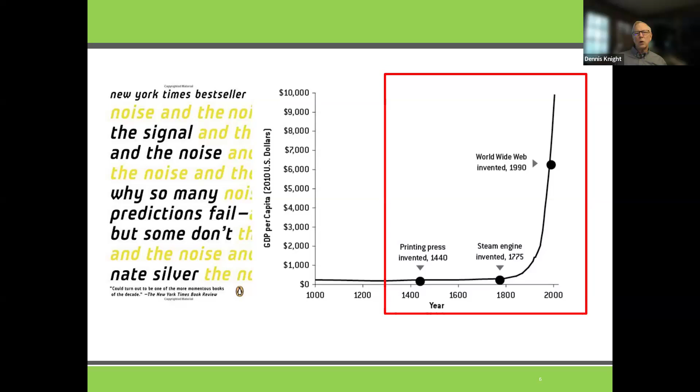So one thing, the improvements in technology since the dawn of the industrial age, and really since the printing press, have allowed mankind to continually improve their standard of living. I've got the gross domestic product in US dollars per capita over on the left here. And you can see that since we developed the steam engine, then the World Wide Web, and now AI, the opportunities to improve the human condition, raise all boats, and help us all live better, healthier, and safer lives just get greater and greater by applying technology to help us do our work, be more productive, do better jobs, and build better buildings.

So we're going to talk about BIM. We're going to talk about integrated analytics. And this is what I want you to take away from this presentation: let's not think about this as a drafting tool, a three-dimensional drafting tool. You'll see what I mean as I get further into it. But how we can automate some of our design, what some of our future trends are, and where these technologies fit into our codes and standards, especially some of the ASHRAE standards that are coming out.

So what is integrated design? Way back in 2007, I was chair of TC 7.01, which is integrated building design. And we wrote the first chapter in the ASHRAE Applications Handbook on integrated design. It's chapter 57 in the Applications Handbook. And we defined it as the interaction among all building disciplines from earliest concept development all the way through the whole building life cycle, in order to achieve an integration of design efforts and the operation of the total building. And that's key.

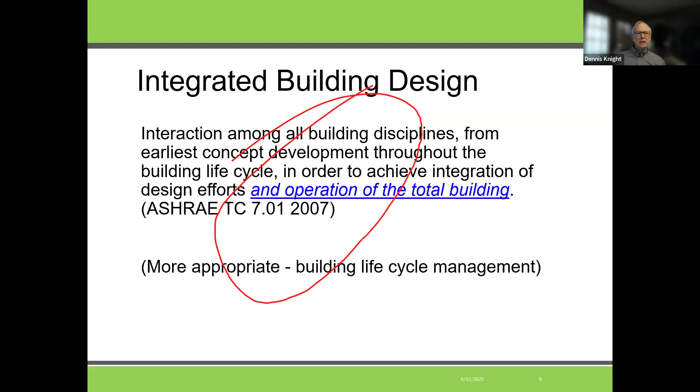Normally our contracts stop at the end of design or at least construction when the owner takes occupancy, but these tools and integrated design processes are thought of as a way to stay with the building throughout its life cycle and keep it working as it's always been intended from day one, and keeping us involved for longer periods of time.

So what is BIM? I don't know if you use US standards or ISO standards or CEN standards, but the definition's about the same in all of them. A BIM model is a digital representation of both the physical, so that's the three-dimensional drafting part I talked about, and the functional characteristics of a facility.

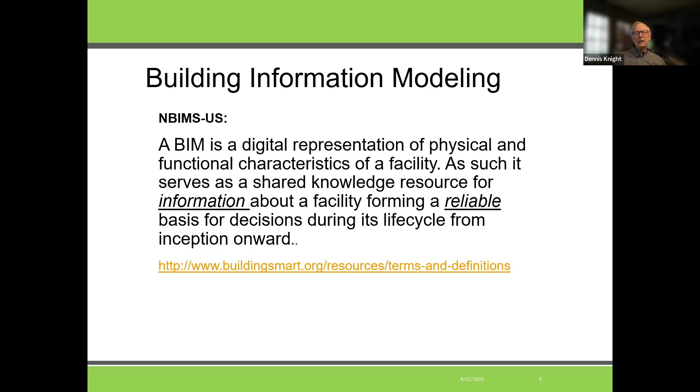And the functional characteristics are what each object or entity within the building does, what it's made of, what its emissions are nowadays, what embodied carbon, what is its operational carbon. Functional characteristics are data that can be built into the objects within your model so that we can do analysis. So it's a shared knowledge resource that follows the building and helps you make better decisions throughout the life cycle of the building.

There are lots of tools. These are just a few. This isn't meant to be proprietary. There are literally hundreds of tools out there that either are a BIM tool or now are interoperable with your BIM tools to help you do your analysis. And so I won't dwell on this long. I just wanted you to know that the word BIM is an umbrella that covers all of these tools that are working in this multi-dimensional environment.

And then integrated building design is a process. That's the end game. We use these tools so that every component is modeled and drawn using these tools. Data is added to it, and the output is a holistic product that can solve many chronic problems within the building industry, whether it's with design, whether it's with construction or constructability, or operability of a building.

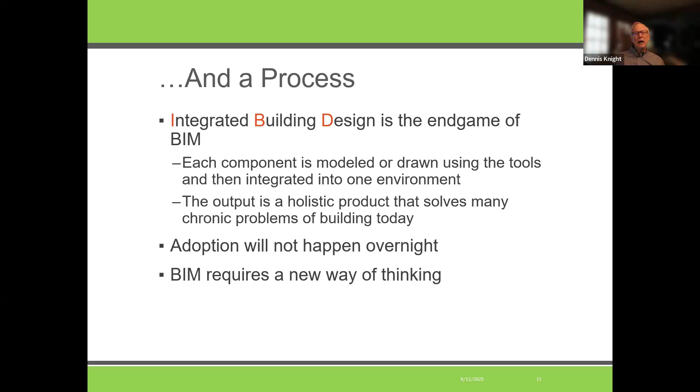Now, I've been talking about this since 2000, for 25 years. I said adoption will not happen overnight, and it hasn't. And we still have a long way to go throughout the world and even here in the US with everybody adopting these technologies. But it requires us to think about a building like we would build a building from the ground up and really think through, if we're going to leverage the power of the technology, every decision we make, every piece of equipment, every material we put into a building.

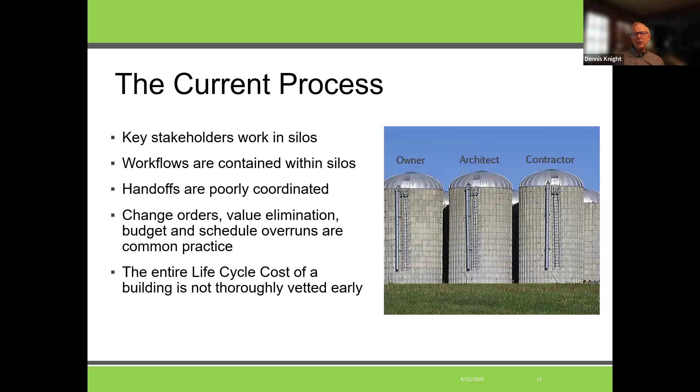What is our current process? Even now, our stakeholders kind of stay in their silos, and our workflows are contained in those silos, and rightly they should be. We should work within our area of expertise, but our handoffs are poorly coordinated between each other, and that causes things like change orders, value engineering, or you'll see I call it value elimination here in a few minutes, budget overruns, schedule overruns. And when we make changes, we often don't think about the life cycle cost of a building and don't thoroughly vet those things early enough.

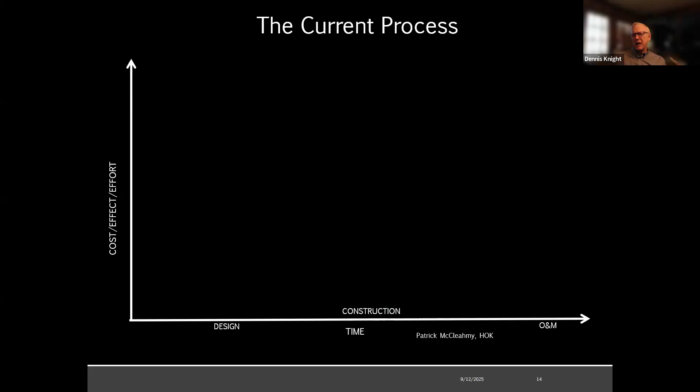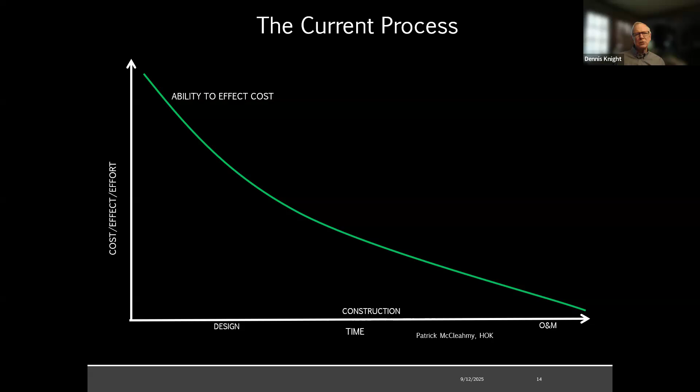So I'd like to go through a little graph that describes this process fairly clearly. So on the left, you have cost, effect, and effort. On the bottom is time, design, construction, and operations and maintenance. So if you were to look at this, our ability to affect the cost of a building diminishes the further down that timeline we go. The more decisions that get made, the less ability we have to change the outcome of that building, what it will cost initially, and how much it will cost that owner throughout its lifetime.

And conversely, as we go down time, the more decisions we've made and set in concrete, the cost of making changes goes up exponentially. So we don't get into construction and decide, we've got half our HVAC systems handled and they're chilled water, hot water, air handlers and VAV units, and then say all of a sudden we're going to go to packaged rooftop air handlers. The cost of that change would be astronomical. So making big changes down the road costs us a lot of money.

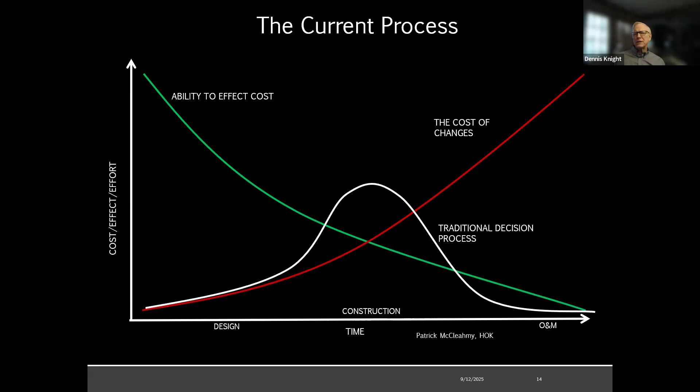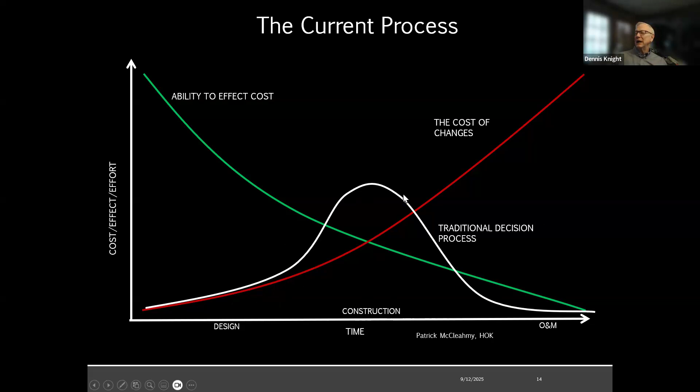Our typical design process is we're all waiting for our other friends in those other silos to get done with their work. We want to let them get done. We only want to do our work once. So we wait. Then we finish up our work. The work comes in over budget, and then we have to work to get it under budget and get it back on track.

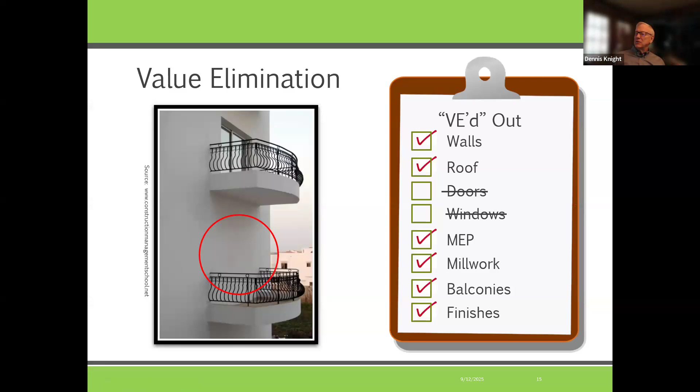And what happens is we go through that ugly value elimination. It's called value engineering, but someone proposes a list of things to cut cost. An owner accepts those things without thinking, maybe without running things by other people. And then we end up with things like this, where something got eliminated that was of value that should not have gotten eliminated. And those things actually happen in real day-to-day construction.

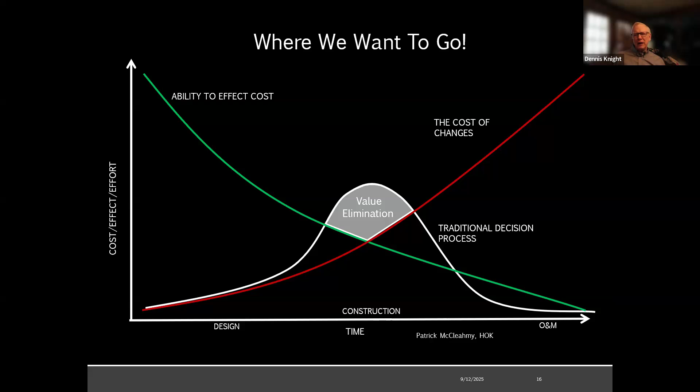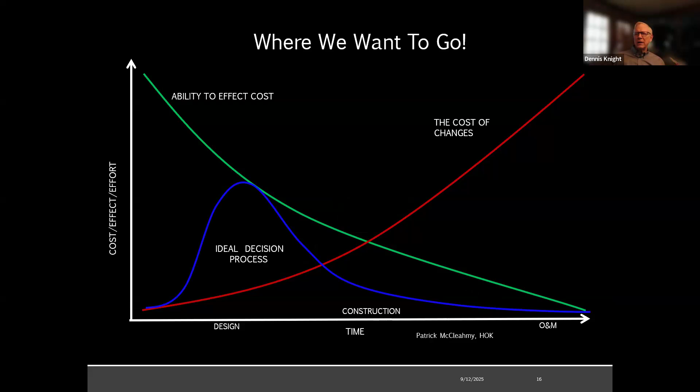So we want to eliminate this value elimination phase or value engineering phase by thinking about things early and create what I call the ideal decision-making process. And BIM allows us to do that because we can build that building virtually in our minds and our computers and do anything we want to it and simulate it before we ever put the first shovel in the ground. And that creates this ideal decision-making process. And that's the real definition of value engineering in my perspective.

So let's look at where we're at. We are at this crossroads. There's still a lot of firms using two-dimensional drafting processes, and a lot of our building code officials still have to use two-dimensional drawings and plans and spec books to evaluate a process. And those are static. Other than the data that you can read in them, that data is not very interactive with anything. So we're in the process of transitioning to what I call a multi-dimensional virtual work environment. Notice I didn't say three-dimensional because I want you to think beyond drafting.

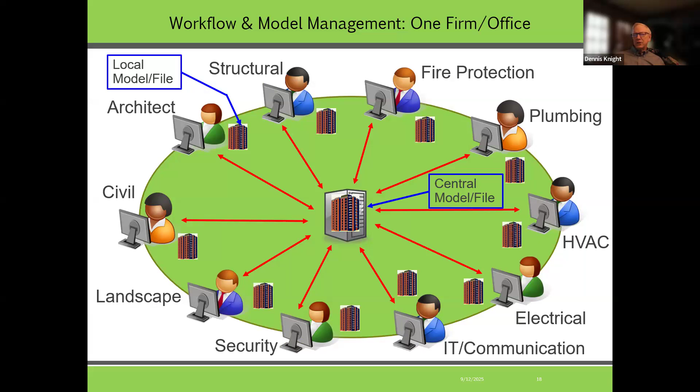Now, some of us are beginning to work, if we're a big firm, with these BIM models. There's a central server somewhere in our office, and all our disciplines are together. Each discipline might have a local model that interacts with a central model on a server somewhere. And that's good for bigger firms. But probably 90% of the market in the world is small firms, 5 people or less, working together on projects.

And you'll have a primary design professional, often the architect, who has a central model, and all the consultants doing their specialty discipline work will work and at some point update that model. And that's still a little cumbersome since you're never working together in the same model and being able to keep up with the changes from all the other disciplines. And that really requires us to backtrack some and catch our model up on a routine basis.

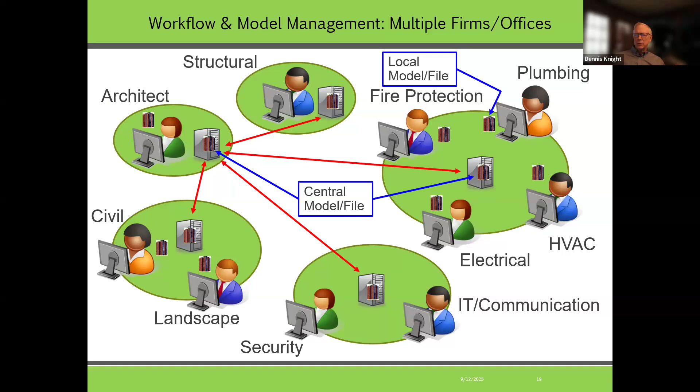But now there's the capability, and most people that are using BIM now are able to work with a cloud server. Every discipline, whether they're in the same office or 1,000 miles away in different offices, is able to work in a cloud-based model and share that model in real time and stay up to date with changes that are going on.

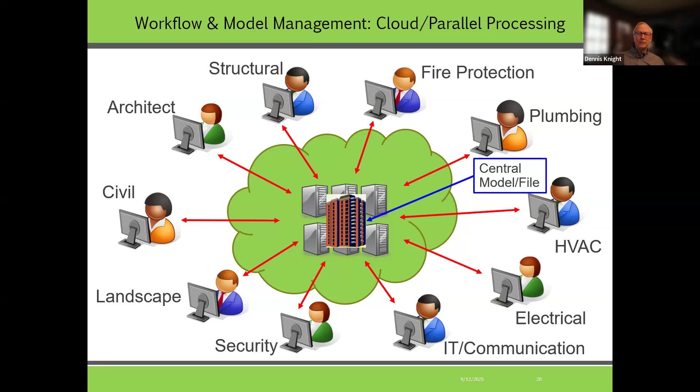Now I'm going to shift gears. I'm going to start talking about the mechanical disciplines here and how we can leverage these tools to get a seat at the table earlier and begin to create more value for ourselves and our clients, and if we're working with an architect, our clients, the owners of the building. So here's an overview of what we can do with modeling and analysis within a BIM.

There's tools built into our BIM tools to allow us to do very early stage energy modeling, load calculations, and estimations. So if you're working in a design-build situation, those early and more accurate estimates are based on more than rules of thumb and allow you to run a building in 8,760-hour weather locations that are local to you. You start with just a concept and massing. It could be just like a shoebox with the percent glazing on the sides and the number of floors, and begin to track your EUIs, your energy consumption, and some of the metrics you're trying to hit.

And then as you move along the timeline, as the architect and the owner define and more develop, you get into schematic facades and can rerun those without throwing away what you've already done. And then you get into the detailed documentation and then do room by room calculations and start being able to use the information within the model to then size your equipment and lay out your systems. And then finally, you get into construction phase and as-built design, where these can be converted to digital twins and used to operate and maintain the building.

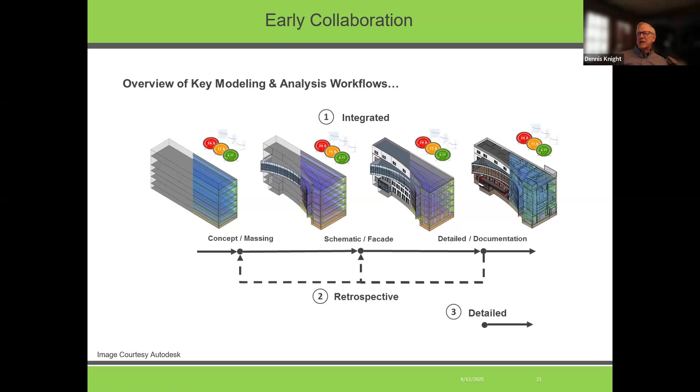So that's kind of the life cycle of our workflow within a BIM. And you can just start with, like I said, very simple shoebox models. You can run numerous iterations where you've changed window to wall ratio, things like that. You can set targets, say it's ASHRAE 90.1, it's an EUI or Architecture 2030. And just by running these quick models, you can be within 15% of what your final building design might be with just these really fast models and see where you're falling with your EUIs or whatever metrics you're using.

And I can see very soon we'll be tracking embodied carbon and operational carbon and zero energy in these metrics as well. And these tools with their digital data capabilities make it much easier to do that kind of work.

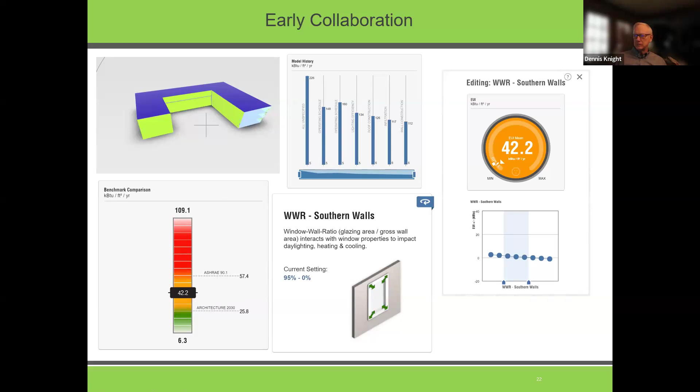So what we need to do as mechanical engineers is get comfortable. If you're doing your load calculations by hand through the handbooks, or if you're doing them with a third-party calculation tool, you just need to jump in and start trying some of the tools that are built into your BIM tools. They follow the same processes. They use our ASHRAE Standard 183. They use our ASHRAE Handbook chapter 18 and all of the information we've used to design systems.

And the way I typically design a system, or when I used to do it by hand for sure, I'd always start with the Applications Handbook, because that would talk about my building, whether it's a museum or a hospital or a school or a fast food restaurant or a laboratory. I'd read about that and I'd see, well, what systems have been employed in there and what seems to work best for that type of building. Then I'd go to my Systems and Equipment and read about those systems and equipment. And finally, I go to Fundamentals to do my calculations. And that's the process that's built into these options on your toolbars in your BIM tool.

And I would say that then next, I would go to my colleagues at my ASHRAE meetings, and I'd go to the ASHRAE Journal to look for recent articles on building types and systems like I'm thinking about, especially if I'd never designed the system before, to educate myself on what other people are doing, what my local labor force is capable of installing and working with, and those kind of things. And then start building my models inside the BIM tool.

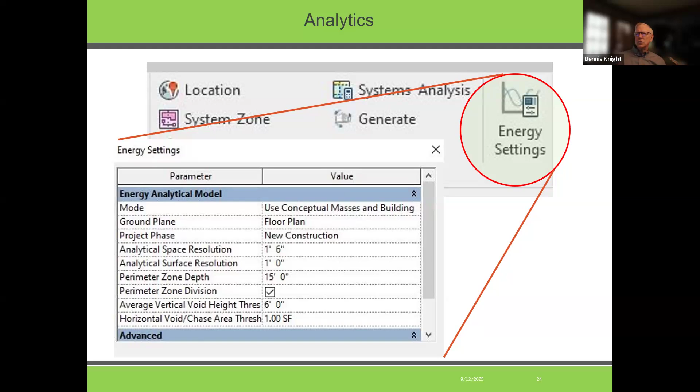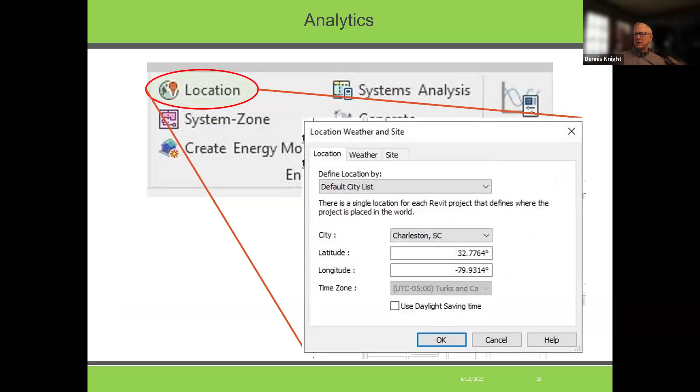And you use the same settings that we do in third-party tools. You have detailed model information, building type, occupancy, operating schedules, systems. Location, the weather files are the same as they are in your third-party tools. And then you begin to break it down, whether you're doing heating and cooling loads, duct pressure loss, pipe pressure loss, or if you're an electrical engineer, your panel schedules.

Schedules and quantities are great design tools. Whether you ever show them on a drawing or not, you can create schedules that you can use to help you get comfortable that your design looks the way it is, and you can help contractors and owners understand more about what's in your building by creating schedules that may not show up on a drawing, like number of pipe fittings, type of pipe, number of air handlers, pounds of ducts, square feet of insulation, number of valves. You can extract all of that data from that model without ever having to go create a spreadsheet outside the model and count all of that yourself as you're designing.

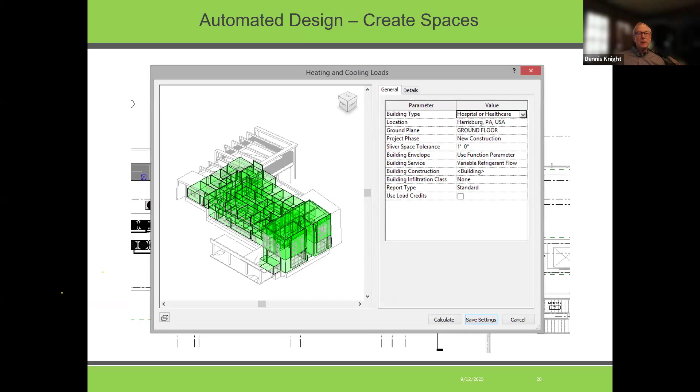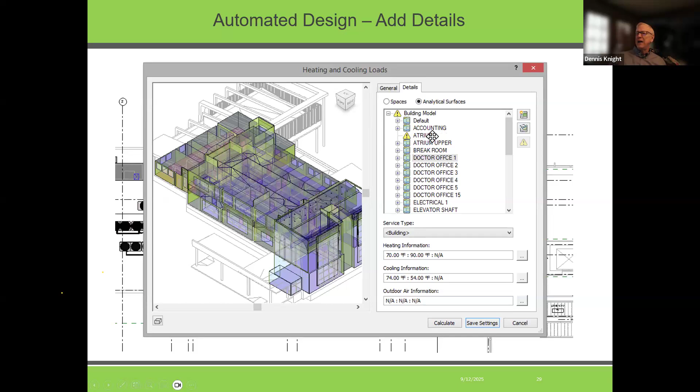So the model inside, the analytical model for cooling loads, does just what we do. It converts the building into one-dimensional heat transfer surfaces that have all your R values, U values, material mass, those kind of things built into the little boxes that make up the spaces that we're going to analyze. Then it allows you to break those down and look. You can get warnings that something doesn't look right here. This room doesn't have any attributes assigned to it yet. And then even drill down into a single space and be able to analyze what's going on.

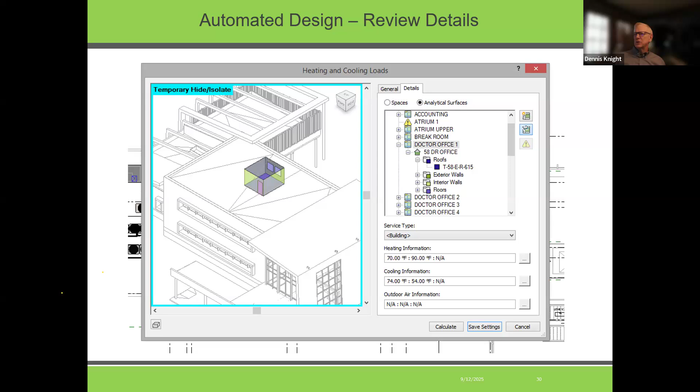Are there exterior walls, interior walls, and what's the roof like? And just check your model that way. Very visual. And that's really required if you're using the more modern heat balance method of the ASHRAE handbooks, which is just a little more accurate way of calculating your loads.

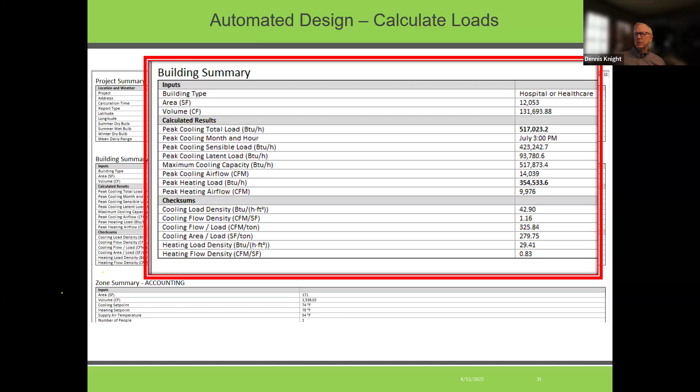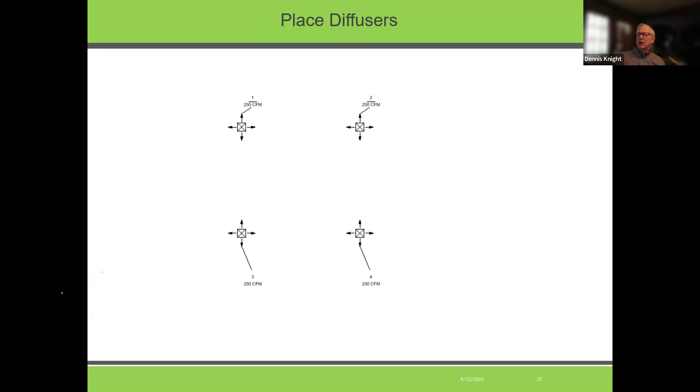So I'm going to walk you through. I didn't put the building on here intentionally, just how you might start playing around. You don't even need a building to start getting into these models. Just create a model and start playing around with doing some sizing and some calculations. So say you've got a space, you've got 4 grills that's 250 CFM a piece. So you got 1,000 CFM.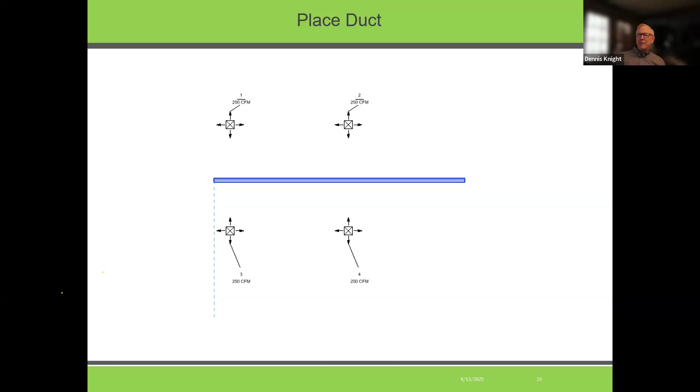You draw a duct. You don't put a size on it. You never go look at a ductulator, anything like that. You cap the duct, run some flexible duct out to it. And then you begin doing your analysis using, say, that duct pressure loss calculation. So you go into the duct sizing methods within the tool.

You can pick equal friction. You can pick static regain. You can add safety factors or change the pressure loss per 100 feet. The system uses the ASHRAE duct fitting calculators to calculate the fitting losses very accurately.

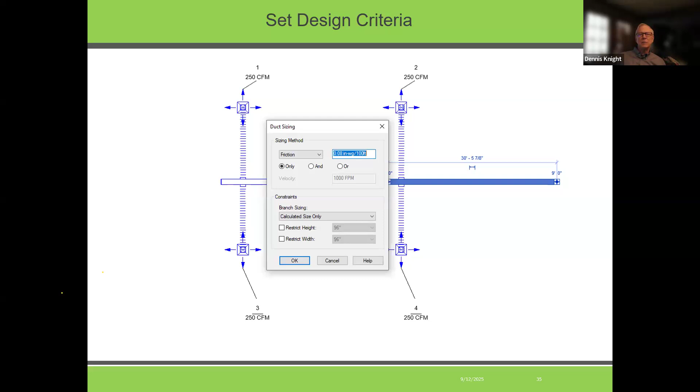Your branch sizing you can change to restrict the height, width, if you've got a structural limitation, and those kind of things. If you're doing, say, dust exhaust or wood chip exhaust, you can change it to a velocity setting if you, say, need to keep the velocity above 2,000 feet per minute or something like that. And then you let it run.

And so here it's run the calculation on this little piece of ductwork. The red line shows your critical run, the longest run. And if you were to have an air handler right where I've got that red box here, this tells you that you'd need 1,000 CFM through that duct to get 250 CFM to your last grill. You'd need 0.13 inches of external supply static pressure on that system at that point to do it.

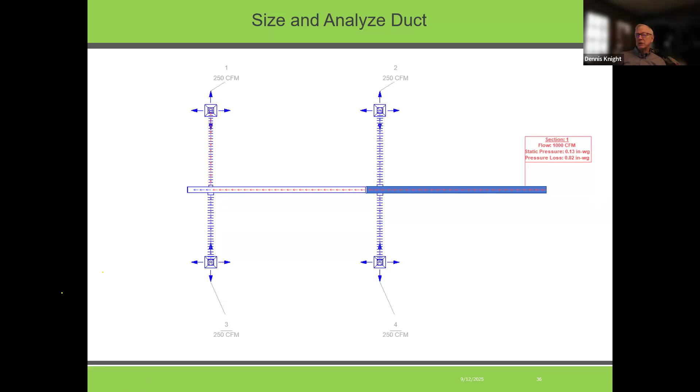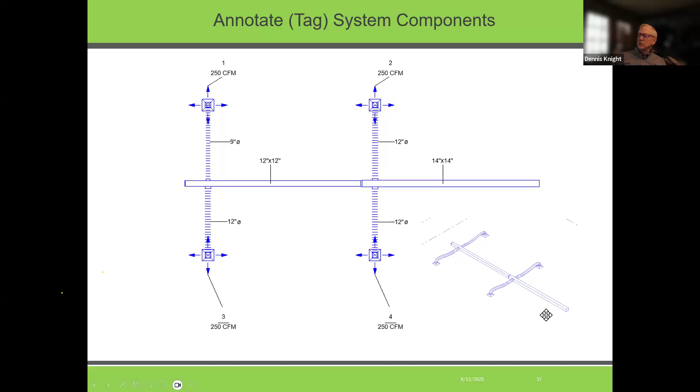Very quickly, you can do these tags. Then you tell it to automatically label everything. So you never have to go in and put labels on now. You can see your system in 3 dimensions as you're laying it out. So now let's add some equipment to that and see how much further we can go with this analysis.

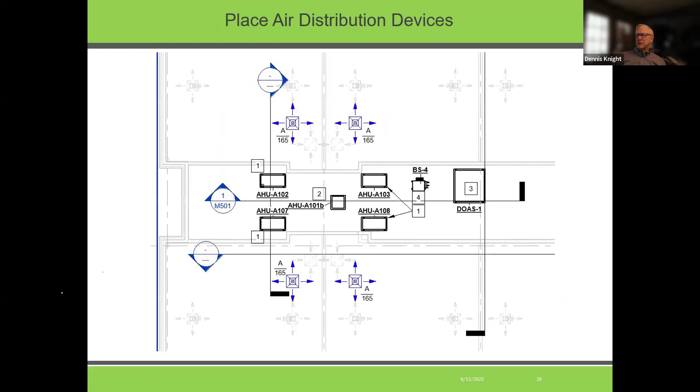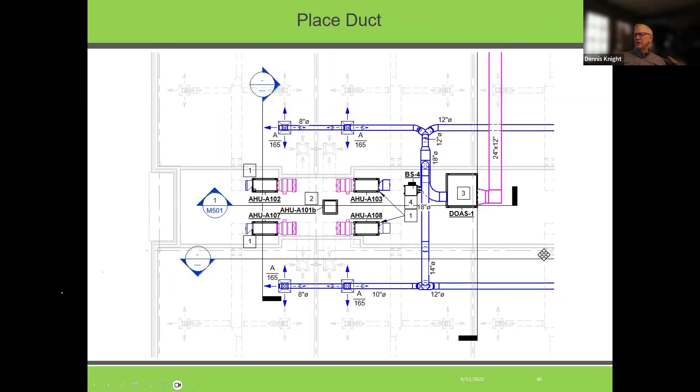So here's some equipment. There's your grills. This time they're a little different. I've run the ductwork, done the calculations for the dedicated outdoor air system. I've got my outside air intake, my supply air, my ventilation air system laid out. I can go straight then from what I've picked as a dedicated outdoor air system, assign properties to that outdoor air system here. And this goes on and on.

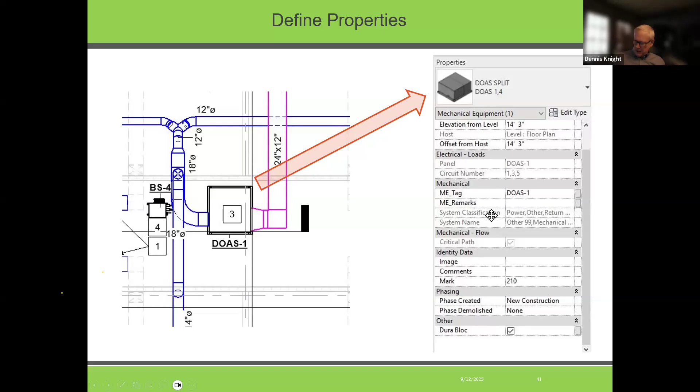I certainly would add the BTUs or the kW, the sensible, the latent, the power requirements, the sizes and things like that. And then take that straight to a schedule that doesn't have to be exported and created in Excel or something like that and then cut and paste into a drawing. This is automatic. And then once you've linked all of this together within your model, if I change this DOAS, it changes the properties and it changes the schedule.

Conversely, if I change the schedule and the scheduled amounts, it does the reverse. It changes the properties and it changes the piece of equipment inside the model. So it's a circular process, forward or backward. Once you've created this and linked all this data together, you change it once and it shows up in every place. And you don't have to remember that there's 10 places in these drawings to change that information and end up with errors, with the same unit shown in 2 different sizes somewhere.

And then the contractor, of course, ultimately picks the lowest cost option, and that might not be the one you want. And that ends up with a change order for you. You can continuously coordinate with your colleagues, the other stakeholders in this integrated design process.

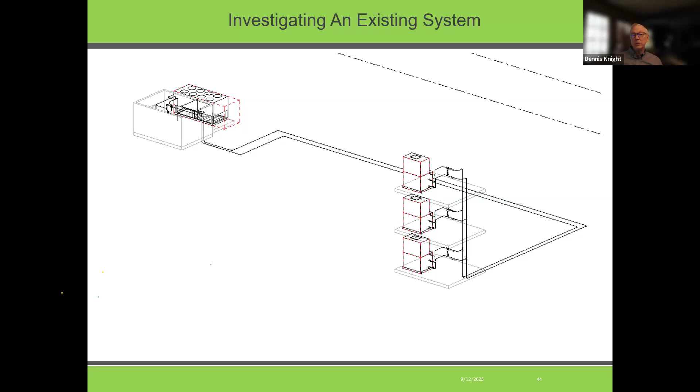And that gets me used to working in one tool and doing analytics without having to jump around. And I'll learn more about the tool by even analyzing these systems without buildings being attached to them. So what are some of the things we're doing today? We're focusing on what we can do with the information. And with AI, this is going to be so critical because it's going to be able to help us analyze all the data within these BIMs at a much faster rate.

It's going to allow us to ask questions we've never asked before, which will help us optimize our designs much better. We're using these tools, like I said, the little early phase energy modeling tools to get a seat at the table sooner, maybe an increased fee for doing that. We're trying to work around life cycle cost and cost benefits, so eliminate that value elimination phase and move into that ideal decision making process.

We're learning the tools. We're trying to learn all the processes and capabilities of the tools. So we do training and go to different training exercises and watch videos and sign up for the developers' training as often as we can. And then we're expanding our service offerings beyond construction to maybe help develop a digital twin. Or if you've got a spec office building where tenants come and go and the building gets renovated fairly frequently for new tenants and new floor plans, we're offering the service to help the owner maintain that BIM throughout the life cycle.

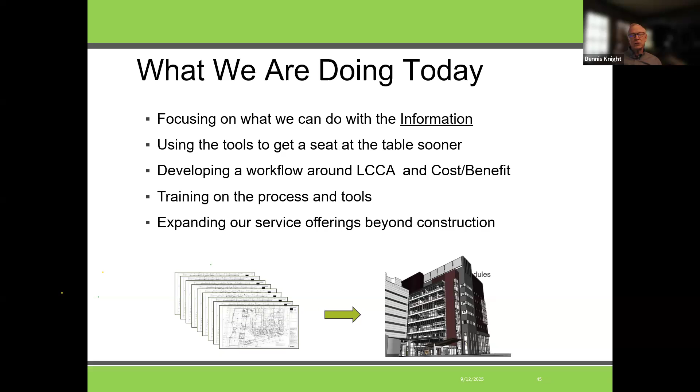Because once you've got it in an as-built condition, rather than running out there with your ladders and your tape measures and your paper drawings and marking up what's been changed since the last time you worked on the project, if the BIM is kept up to date, you can always get started right away working on the new project you've been given with an existing building. This is crucial in laboratories and hospitals, that BIM models be kept as-built to help with operations and then help with changes, because these buildings get reconfigured all the time for researchers and surgeons and things like that.

We're looking closely at what can we automate. So can we automate that duct design, that equipment layout, those schedule creations? And then determining what software we no longer need. Well, maybe if we can do it inside the BIM, we don't need something for pipe pressure loss calculations, duct pressure loss calculations, load design calculations, pipe stress, those things. There are interoperable tools that are made to work with the BIM and work with our systems for that.

And then working at what level of detail is required. And ASHRAE has a really good standard now, ASHRAE Standard 224, that I had the opportunity to be one of the authors on, that is really written for the owners on what level of detail to ask for depending on what you're going to use this BIM for. Are you going to build the building and never look at that model again? If that's so, you don't need that much detail.

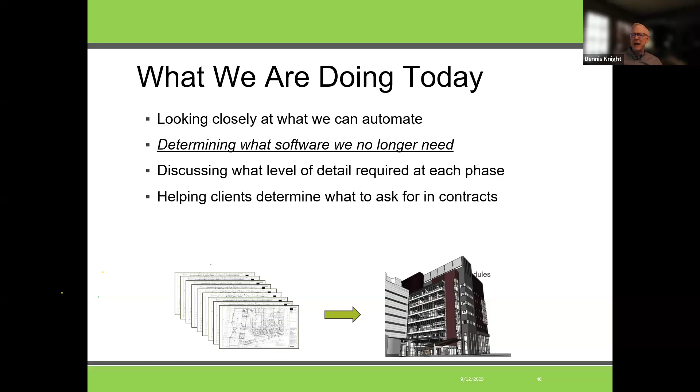Are you going to use this model throughout the life cycle and even help operate and maintain the building? There's a different level of detail required to go into that model for that owner to be able to do that. We're helping the clients determine what to ask for in those contracts, and Standard 224 does that. And then we're looking 5 years, 20 years out. Can we help them maintain that model, keep a client for life, keep our revenues up, and stay at the table longer?

Integrated project delivery is a new contract method that's particular to the AIA, or the American Institute of Architects, where every entity within the project is a stakeholder until they turn it over to the owner. So you kind of own your piece of the building and are responsible for it getting designed and built correctly before you give it to the owner.

Integrated specification writing. There are a lot of specification tools now that, when you bring in a piece of equipment, a chiller or an air handler, go ahead and draft the specification if you've got your office standards set up correctly. Automated cost estimating: contractors are already using this pretty heavily now, especially the bigger government contractors that do work for the governments on these bigger projects.

Advanced clash detection has been one of the real key features that's been around since day one, really, and getting better all the time, that catches these clashes as you go. I've been told by some contractors that that one feature alone has saved them about 15% on the cost of construction by being able to do clash detection early and not have to tear out a bunch of stuff when you run into some other discipline's work.

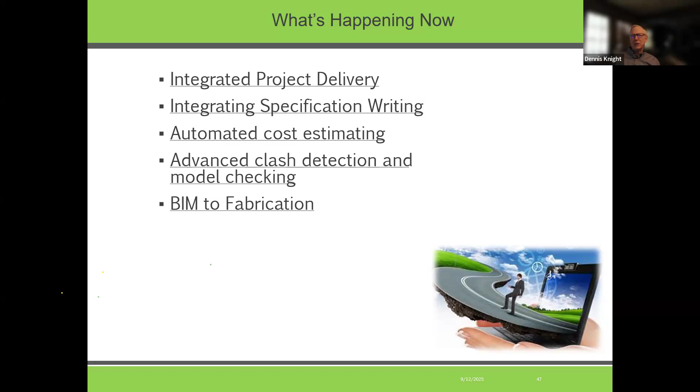And then, of course, BIM to simulation, the things we've been talking about: energy modeling, duct calculations, load calculations, daylighting, CFDs if you're doing laboratories and operating rooms and things where you really need to look closely at what your airflows are within a space from a health and safety standpoint and from a process standpoint.

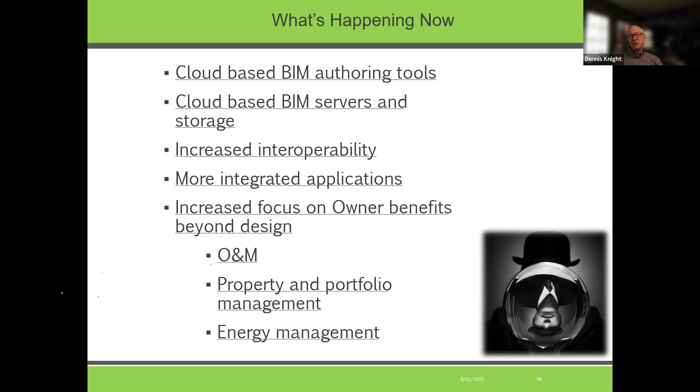A lot of cloud-based tools now. Cloud-based BIM servers used to be a wish list item, but there's plenty of them. We've got increased interoperability. There are more integrated applications. And we're trying to increase a focus on the owner benefits beyond design. So operations and maintenance, portfolio and asset management, and energy management. And now you can add to that carbon emissions management as well.

Virtual design and construction. So doing everything inside the model before it's done. It's a fast growing segment of the market. And virtual reality, being able to walk through a model with a VR headset on and see what the building might look like and what your systems look like and what they might run into. Augmented reality, so you're taking it out to the field with tablets, headsets, being able to lay out your plumbing, lay out your ductwork, lay out your hangers and mark them accurately with an augmented reality tool built into the BIM.

Digital twins, very popular to help maintain the asset. The operational carbon emissions, the embodied carbon emissions, the energy consumption, the maintenance schedules can be laid on top of your building control system, your owner's financial and asset management systems to help leverage the data in a BIM.

Off-site construction, like I mentioned on the data centers, but there are firms in Florida I know that just focus on fabricating pipe tunnels for big central heating and cooling plants for cities. These tunnels will be built, they'll fit together. They're made in sections to go on tractor trailers. You go out to the site, dig your trenches, pour your foundations, and set the sections in place and connect them up. And they've been built, tested, and fabricated in a clean factory environment. You need less laydown space on your site. The site's safer because of that, things like that.

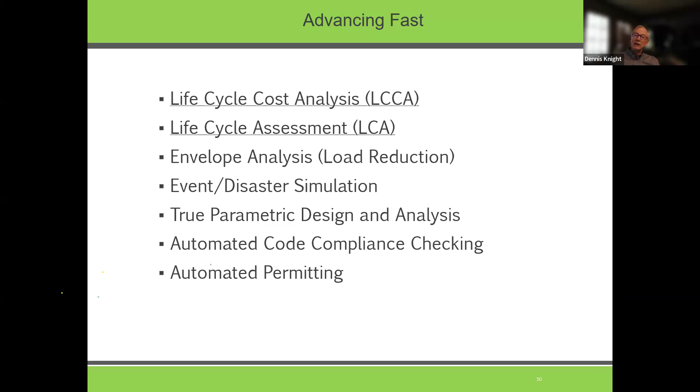You can see the list here. There are beginning to be tools that'll check for codes, just like you check for spelling in a Word document, and then maybe issue an automated permit, which would speed up time and help an owner. Time is money to an owner. So the longer you're in construction, the less money they're making, or the less products they're producing, depending on the type of building. And the list goes on and on. We've got AI and generative design now. One little book we wrote back in 2010 is an introduction to BIM.

It's available for free download. It's got a lot of the information in this presentation in it. It's got a lot of tools. Believe it or not, it's not terribly out of date, even though it was written 15 years ago. Most of the tools are still around and gotten better. But it's a great primer. If you've not tried anything yet, just go to the website, type in the Introduction to BIM, download it, and read it before you start deciding what kind of tool to buy.

I mentioned Standard 224. Its primary audience is an owner. Its adoption by owners will help them write their contracts to ask you for the correct level of development in these models. It was based on the National Institute of Building Sciences National BIM Guide for Owners. ASHRAE and NIBS partnered to write a joint standard, and we've got it ANSI approved. And it goes through planning, design, construction, and operation, and what would be required in a BIM depending on where you're going to stop in that hierarchy.

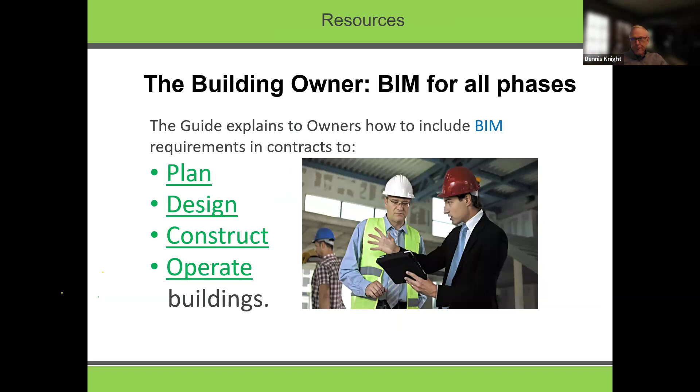And I'll just skip through this. So what are some of our current barriers as we get to the end of the hour? Because I have a fairly hard stop at the end of the hour for another meeting. But I said, again, adoption of a digital practice mindset. You've got to think, how can I automate this? How can I stay in this one environment? And what are the things I can do and document well enough to know I've done my diligence and done a good job for my owner and my client.

There's still a bit of lack of interoperability, limited parametric design. So the best parametric design example I can give you is making a change in a schedule or on the drawing tool or in the properties and it propagating to everything. That's parametric. We're not yet at the point where if the architect or the structural engineer, the mechanical engineer, civil engineer makes a change, that all our other systems try to suggest a new design or an adaptation of our design to fit that change and let us know whether to accept it or reject it.

That's coming, though. With generative design, we will soon be able to, when an architect makes a change to the building that we've already laid systems out, our systems will then generate a new design change suggesting to us what might work. And then we have the opportunity to accept it, reject it, or make changes to that suggested change. That will be the day that we've got true parametric design features.

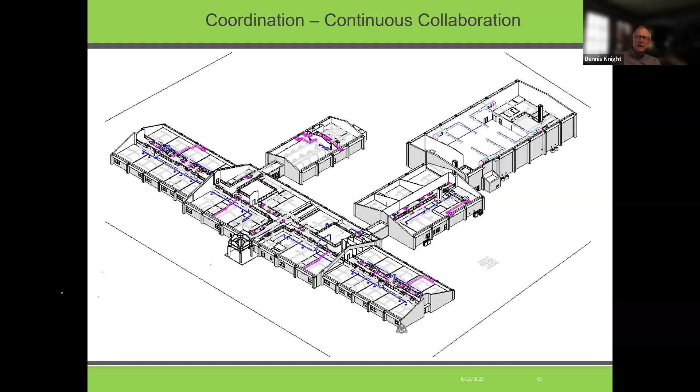You could put your rates, whether they're CFM per square foot, air changes per hour, or CFM per person. So you could add a column for number of people. You could pull that from your load calculation software, do the calculation, and have a schedule that would show you what you need for every space in the building. And that all could be automated in this process. And say you needed to change something, you just work in the schedule to change it, and it propagates all the way back through your system.

You may have to do a little bit of work if you were to go from, say, 500 CFM of outside air in a system to 2,000. You may have to go back and tell it to rerun duct sizing calculations. But what you would do there is create a schedule with your diffusers and their CFMs, change the diffuser CFMs, and then go back and rerun and let it automatically size it. You wouldn't have to go in and erase things. So you could very quickly automate that whole process, and you really wouldn't have to buy another piece of software to do it.